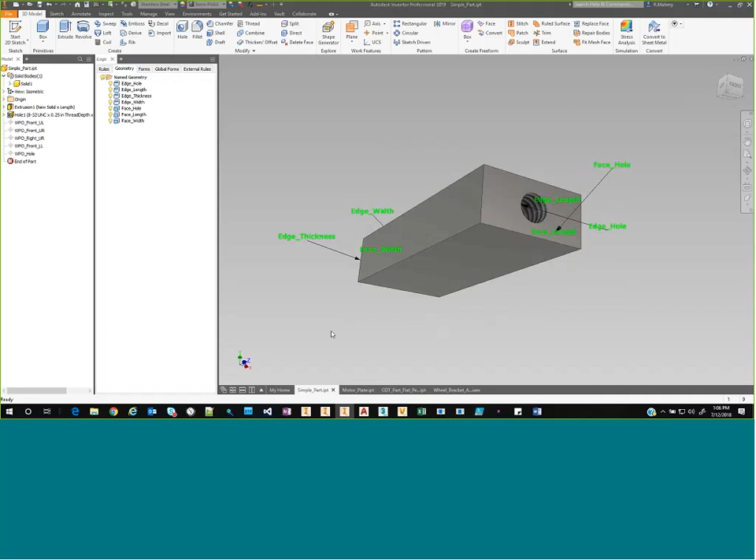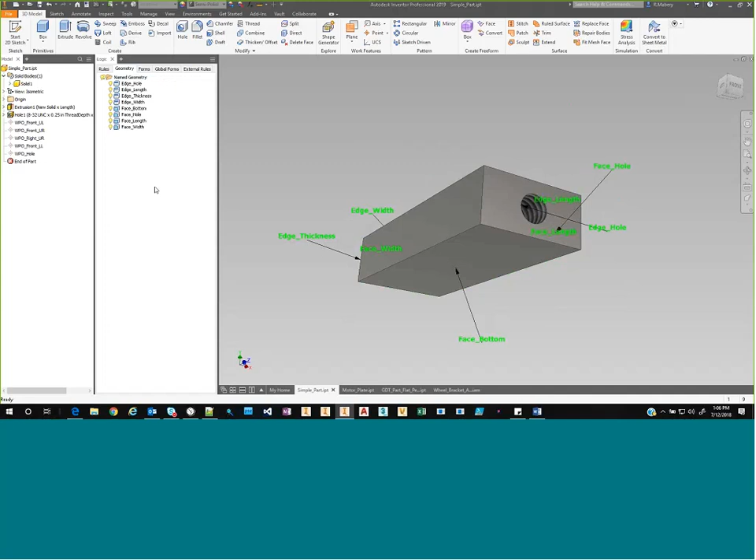If you guys have Inventor 2019, I can select on a face or an edge or whatever entity I want, and then using right-click, go down to the contextual menu to the new command called assign name. What this actually does is create an attribute and assigns that attribute to that entity. In this case, I'm going to call this bottom face 'bottom.' I hit OK, and it'll show up over here in my geometry tab of my iLogic browser.

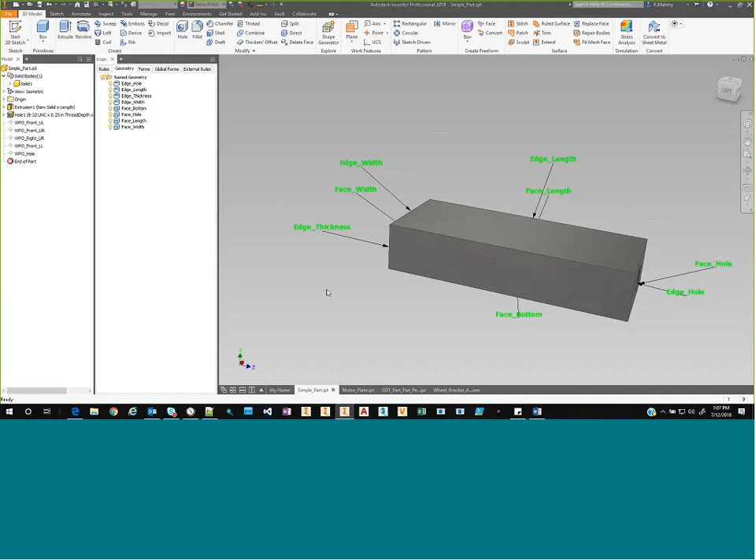So what we use those for is to go back and find geometry that I want to work with later on. In this case, I've got an edge marked here for edge length, edge width marked, and an edge thickness, and that's working directly off of that geometry. So there is an attribute tied to those faces or edges that the iLogic code can go back and find.

You also notice that I have some work points listed out inside of my model browser. We use those as well when we go back and create the 2D drawing. So the first thing I want to do is turn back off this geometry.

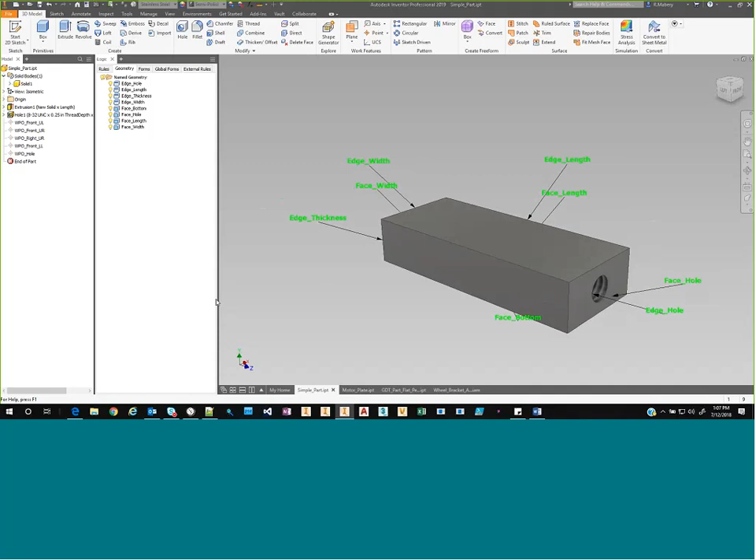Switch back over to my Global Forms tab. I just stuck some of my rules out here on my Global Forms tab just to make it easy for the WebEx here so I can easily create these. So I'm going to go ahead and run my 2D drawing first.

Again, making a traditional 2D technical drawing. I'll give you a quick overview of what's happening: the code goes in and finds a parameter inside of my model. In this case, I'm defining the width parameter as how I want to control the scale of my drawing. So it finds out it's a half inch, it takes that parameter and calculates what scale to place that first view on. I'm going out and grabbing my standard .dwg template.

Again, I'm not opening up an existing drawing, I'm making this straight from scratch. I've predetermined that this is a B sheet, or a B size drawing, based upon what size this part is. That's something I know in the back of my head as I'm doing this code. This is probably always going to be a B size sheet of paper. I'll talk about handling those other cases here in just a minute.

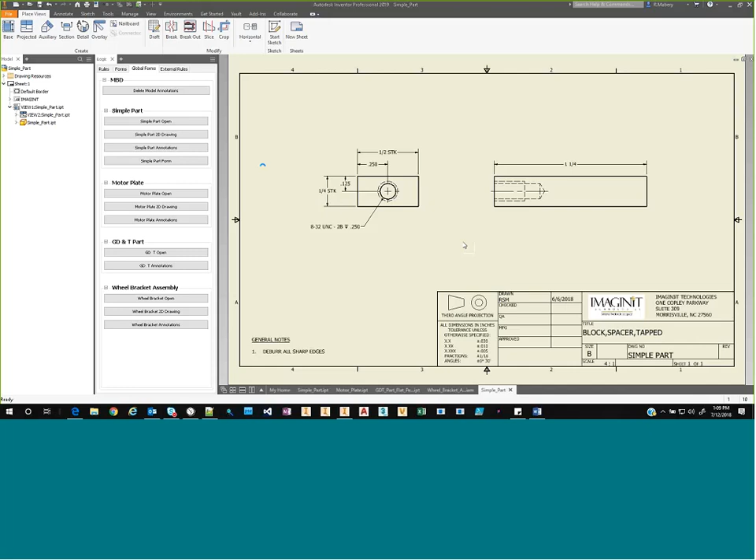So it throws up the base view, creates a projected view, goes through and adds center lines. You notice there's center lines turned on here in both the parallel and normal to view modes. I'm inserting my dimensions. You'll notice here on the front view, I've got some locating dimensions for locating my hole, and then I've also got some stock dimensions.

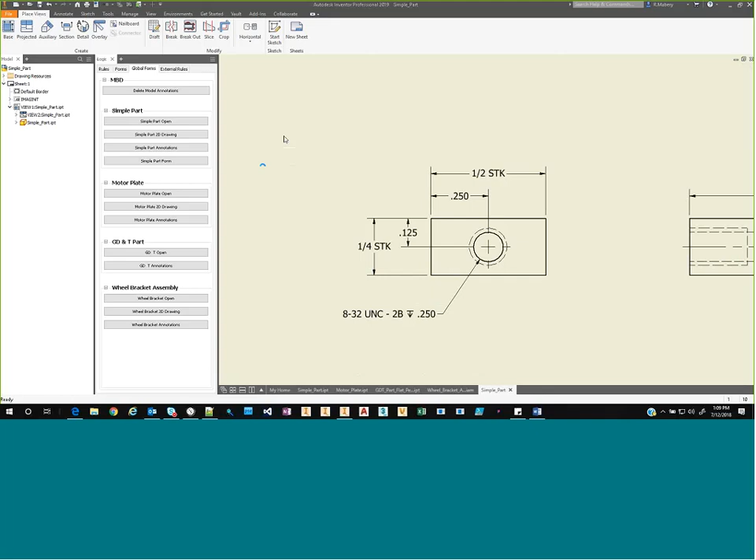Those are using two different types of dim styles. That's something I can control with code. In the hole locating, I'm using 3 place decimals. And then in the rough cut, or the stock dimensions listed there, as well as in the overall length, I'm using a fractional. Those are just different dimension styles that are listed out inside of my Styles and Standards editor in my drawing.

And I'm just calling out whichever tolerance block is required. I'm also inserting the hole note, so this hole note is being inserted, and there's a general note down I'm putting in the bottom left corner.

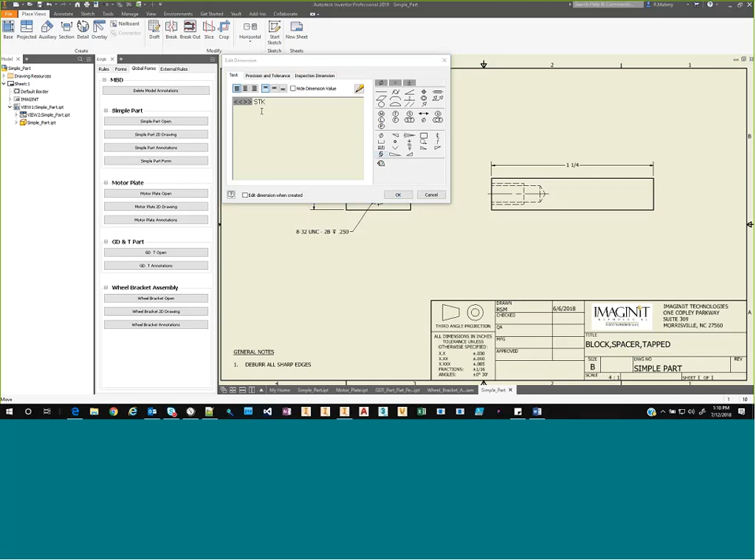These annotations, these dimensions, there's nothing special about them even though I'm creating them with code. If I go inside here and edit this dimension, we get the regular edit dimension dialog box, and we see the STK text I applied to the end of it. That just stands for stock—I'm buying a piece of 1/4 by 1/2 stock, and saw cutting it off to 1 1/4 inches long.

Same thing with the hole note. Nothing special about this hole note, it's a standard hole note. It is tied back to the geometry.

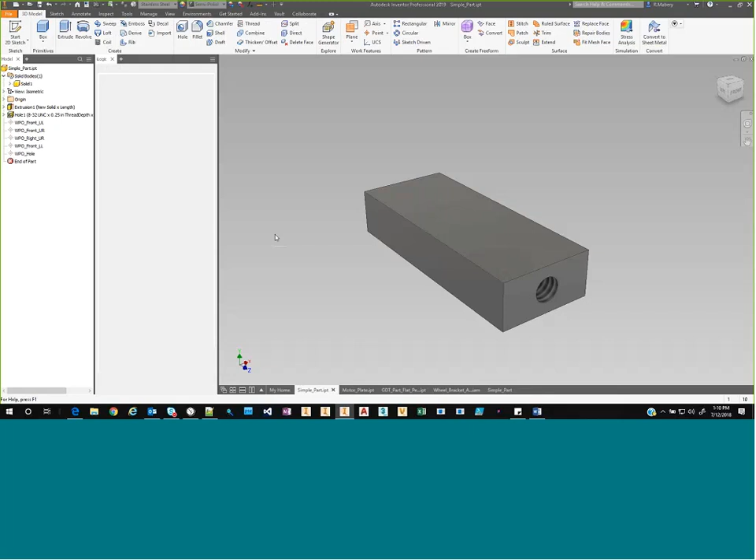So if I go back to my simple part drawing—or I'm sorry, my simple part—I'll open up a quick little form I made, throwing on some dimensions. I can change that length to 1 1/2 inches, and then shift my hole over just a tad, and then go back to my drawing again, and we'll see that it updates. It's all associative, still there.

You'll notice I'm not doing anything in this case about arranging dimensions. That 375 should be shifted over a little bit. This 1.5 inches should be shifted over a little bit. But all that is available through the code.

So the positive side of creating drawings this way—obviously no need to manually create this drawing. This works great for configurators when things are really well known. This is a configurable part; that overall length might change, maybe my hole location might change, so I need a new set of prints every time. So allow the code to go create those for you.

It's still highly recommended that someone puts a pair of eyes on these. You never know what's going to happen. Someone should always be checking every drawing, no matter what, whether it's manually created or created by the code.

Some downsides to creating drawings like this: you have to know everything that's going to be annotated. In this case, this is a very simple block, and if the only variations might be length, width, and thickness—sometimes I might have that tapped hole, sometimes I might not, and the hole size could possibly change.

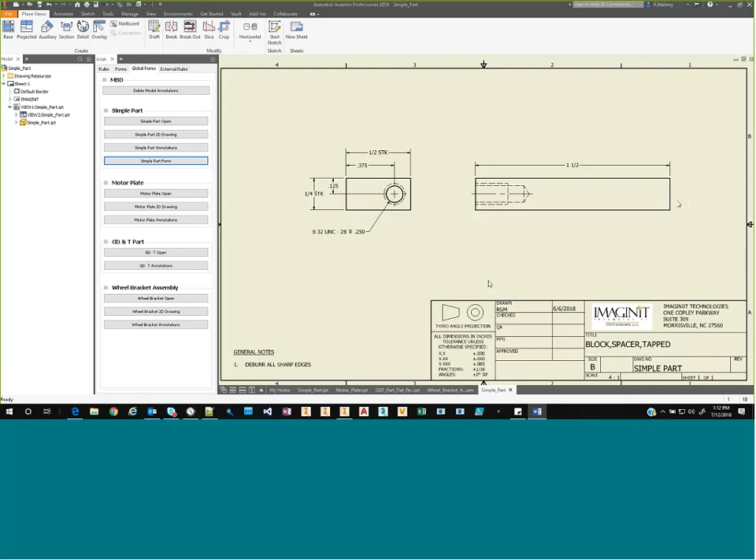I have to make accommodations for all of those instances when writing the code for this drawing. In the case when there isn't a hole, obviously I wouldn't need this 1/8 dimension or this 3/8 dimension up here—those would be gone. So I would space this 1/2 inch dimension off differently, and that 1/4 inch dimension off differently, and obviously I wouldn't have to throw this hole note on as well. I have to understand all the possibilities that might happen and make accommodations for those.

If you think about the general steps you take when placing a dimension—if I'm manually creating these dimensions, I know I'm going to place a 3/8 dimension to locate that hole, and then I know the next one is only going to be the width dimension. So I'm determining the location of this as I'm placing it, and the code is going to have to know all of that as well.

More complex drawings—if you get into assemblies, getting into much more complex parts, moving views—sometimes I might have to have a detail view, sometimes I don't. My section view might have to move around based on what it's trying to describe out of my assembly or part. Throwing on balloons, etc.—all of this has to be really thought out before you start building up your code.

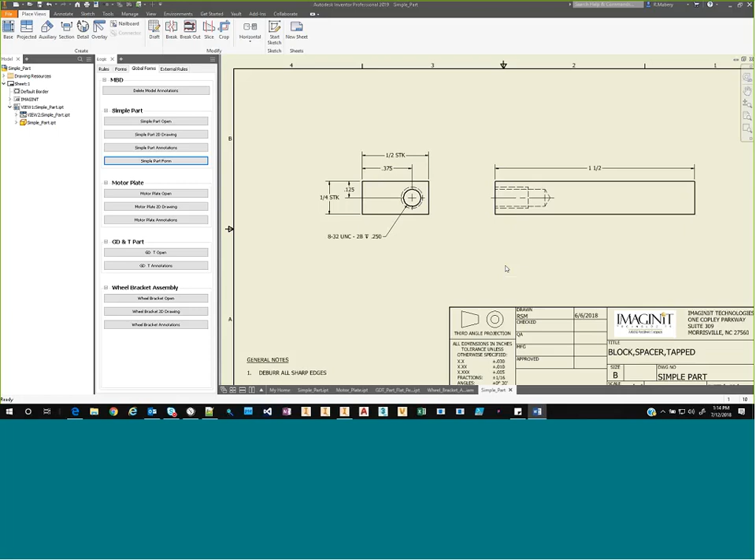So that's the positive and negatives of something like that in a traditional 2D technical drawing. I'm going to switch back over to my simple part here, and let me shift back over my hole just for fun.

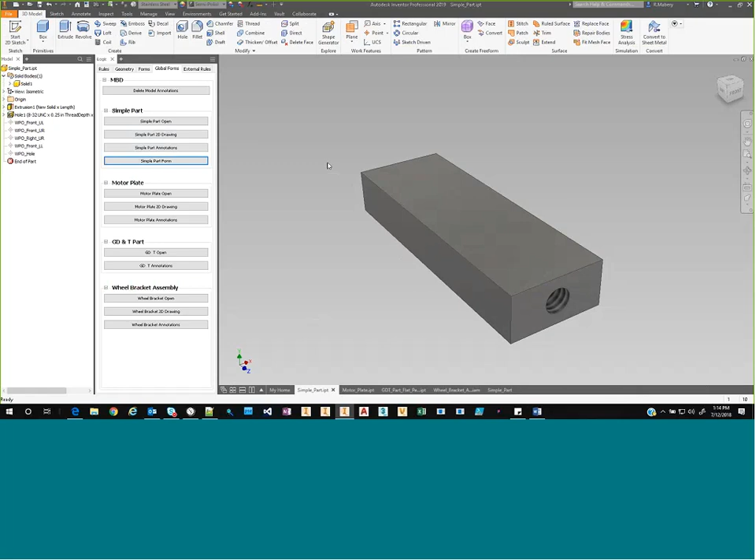Okay, so we can also create what's called model-based definition. It's really been taking off momentum in the last few years. It's a way of describing our model inside the 3D workspace. If you go take a look at your annotate command inside of a part in Inventor, we can see the 3D annotation tools.

My geometric annotation tools, I got some general annotation tools, and then some notes. Model-based definition was first introduced in part mode only in Inventor 2018. And then in the 2018.1 update, they expanded it and gave us some tools inside of the assembly environment.

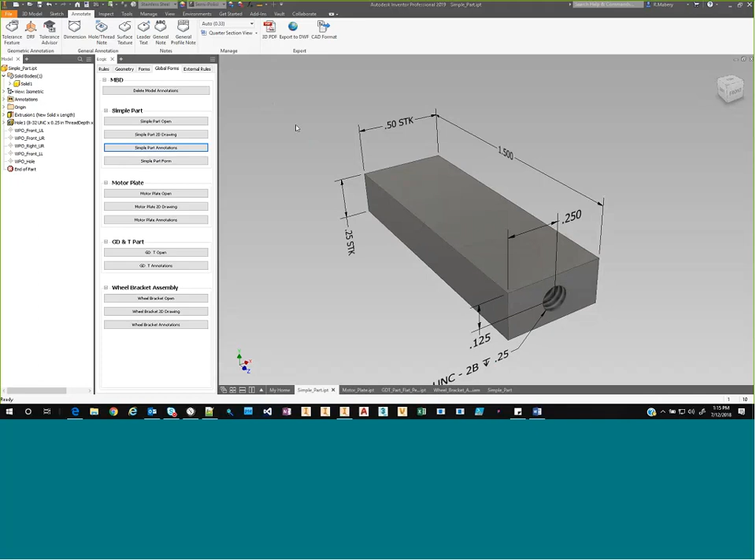So in the same case here, I'm still going to be looking at that named geometry that we saw before. I still want to go back and grab an edge or a face based upon whatever type of annotation I'm trying to put on. If I run my simple part annotation rule here, I'm pretty much creating the same dimensions that I saw in that simple 2D technical drawing. So what I'm doing is going back and finding those named geometries, those attributed geometries, finding an annotation plane to create it upon, and then spacing that dimension away from my part some certain distance. I've got my length and width, thickness, the hole locating dimensions, and a hole note.

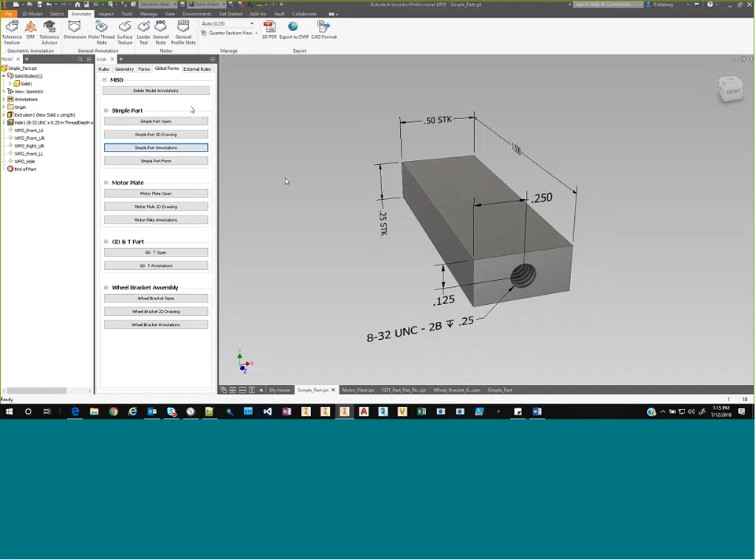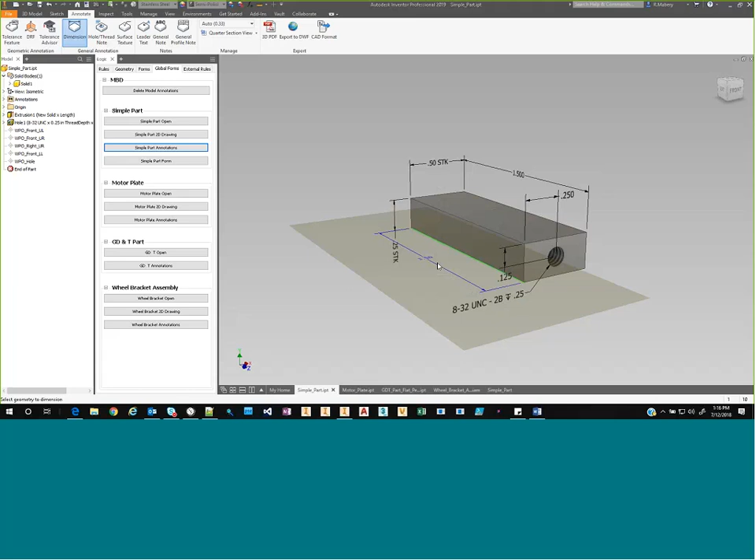Nothing really different about how these are created. If I created a standard general annotation with my dimension tool, I'm going to go click that edge. If you haven't created a 3D annotation in a model, I have an annotation plane that I can assign that to. I'm simply hitting the space bar on my keyboard to flip it back and forth between them. But in essence, it's the same process that I'm doing with the automation tool.

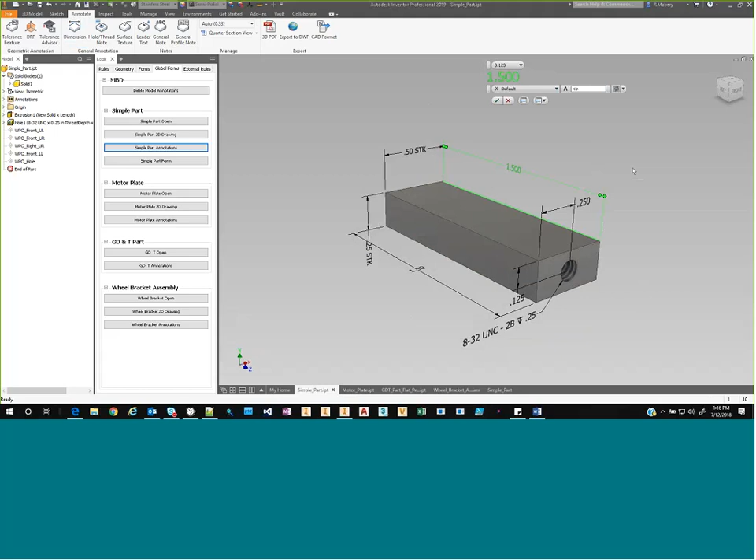Okay, nothing special about these. Let me get rid of this box. There we go. So if I double click and edit that 3D annotation tool, I still have my standard settings. I can change the precision of this, change it from a default to a basic to a reference, etc., changing the tolerancing. One of the drawbacks to creating this with code is I cannot, as of the 2019 version, change the tolerance of this to, say, a basic dimension. That would have to be something I come in manually after creating it and do. But again, you wouldn't be able to tell the difference between what I was creating manually versus what I was creating with code as far as the 3D annotations.

Okay, so some of the things that are supported through iLogic, or more importantly through the Inventor API, are what's in the general annotation panel. So dimensions, hole threads, notes, and surface texture symbols. And then what's in the notes panel: leaders, general notes, and general profiles. What I cannot do at this point is GD&T. I can kind of get around some of that, and I'll show that in a bit. But generally, anything in the geometric annotation, as of the 2019 release of Inventor, which is what I'm running here, is not yet supported through the API.

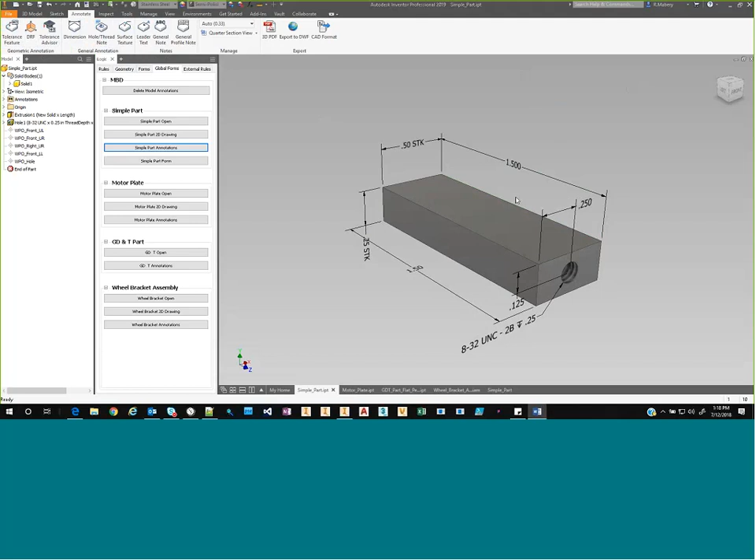Okay, I'm going to go ahead and clean up this model by hitting my delete model annotation rule. I'm going to switch over to another part here, something a little bit more complex. It's simply a motor plate. It's got some tapped holes in it, and I'm machining a channel, a face down on the bottom side. So again, I can create a 2D drawing with this.

Going to see a lot of the same things that we saw in the last example, although in this case I'm throwing in some additional entities. I'm going to throw in some center lines, as well as a surface texture symbol, and then a leader note. So again, I'm creating various dimensions based upon what has to be dimensioned, throwing in a hole note. What we see here in addition are the center lines, that is a pattern down in my parts. Go take a look at the piece part there: there is a rectangular pattern of the holes, and that is showing up as center lines in my 2D drawing.

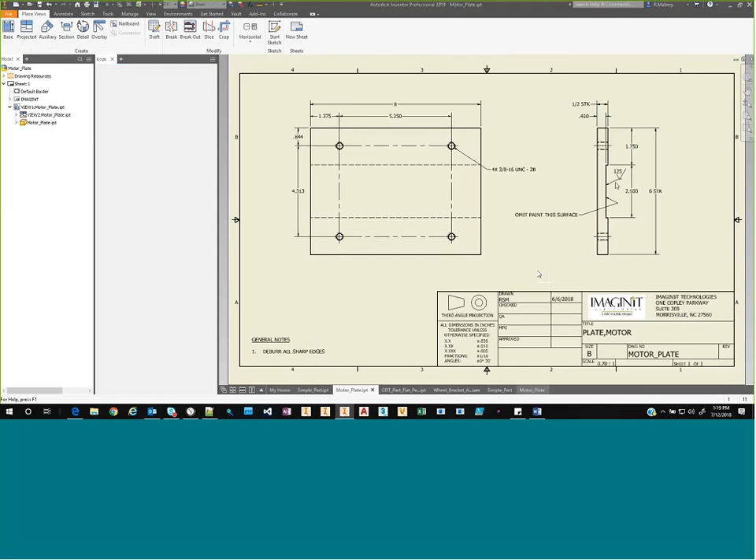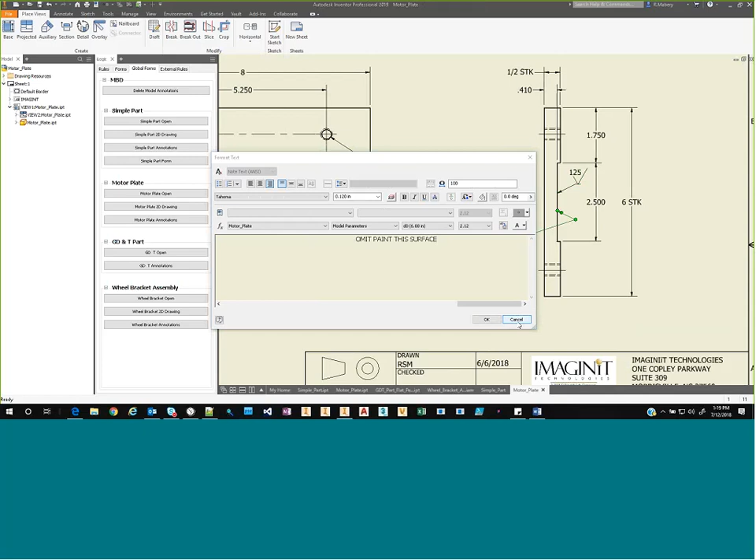And again, what I have here new is a surface texture symbol, and then a leader. Nothing special about this guy. If I go through and edit it, you won't be able to tell a difference between this surface texture symbol or something that I manually created. Same thing with the leader. There's my format text dialog box for that leader. And again, I'm working off of named geometry, whether those geometries are faces or edges.

All right, let me switch back to my motor plate part here, and we'll look at some annotations, some 3D model-based definitions.

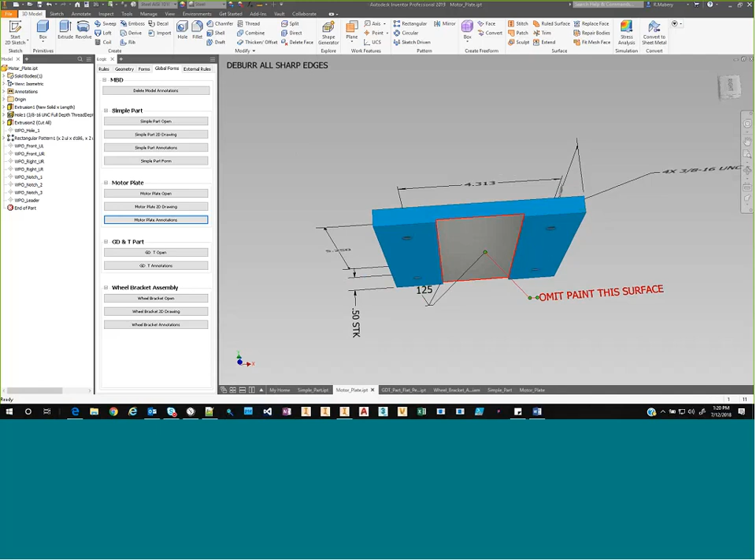So again, I'm creating dimensions, as well as surface texture symbols, and then a general leader. And again, I have the same control here. If I go back and edit the surface texture symbol, I can modify whatever I need to modify about it, and then my general leader note.

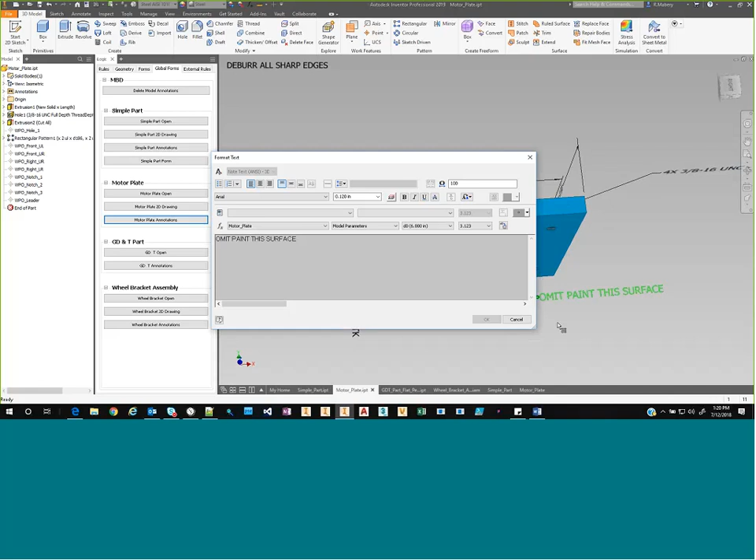One thing I will say about the general leaders, if you create those inside of Inventor with code as a 3D annotation, there is a slight weird thing going on with it. You do have to call out the font specifically. If you do not call out the font, and I go back and try to edit this thing, it gives me a little message that says the expected font of blank isn't available. Everything still works, it's just a weird little bug that's in the system at this point in time.

So again, nothing special about those 3D annotations, whether they be the dimensions, the surface texture symbols, or the leaders.

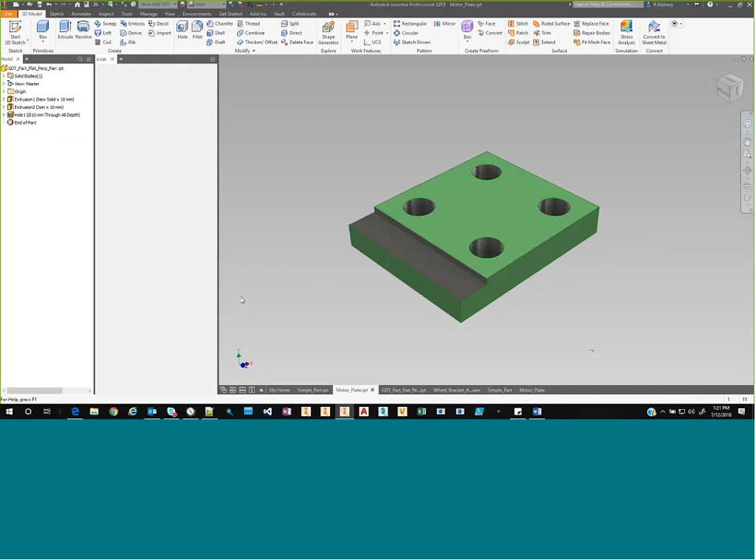I'm going to switch over to a little part here for some GD&T. As I mentioned earlier, I do not have the ability to create tolerance features. I cannot build compound tolerance features. I can't build anything out of this, but I can kind of fake some of it.

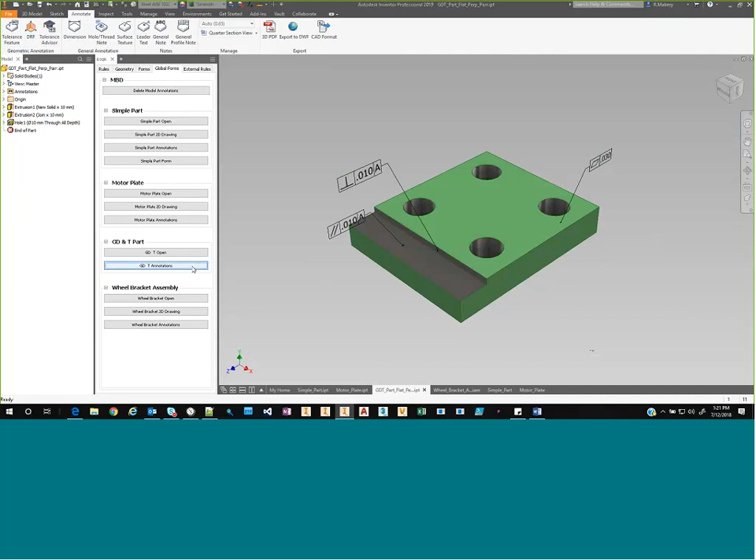So if I run the GD&T annotations rule here, you will notice that I've applied a datum down here to this face. I'm saying this top face is flatness within 30 thousandths. I've got some faces that are parallel and perpendicular to A within 10.

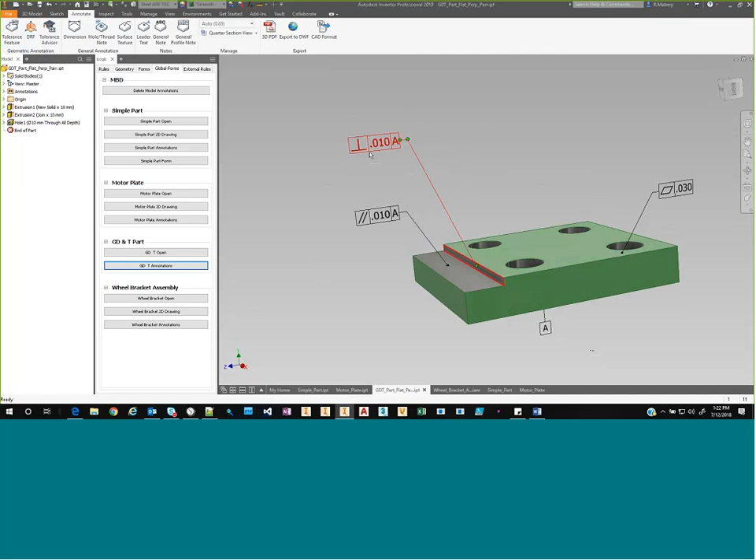The drawback here is that I can't go back and edit these at this point. I can create them with code, I can apply them to a face, I can apply what appears to be a feature control frame. It even shows up over in my annotations, but what I can't do with it at that point is edit it.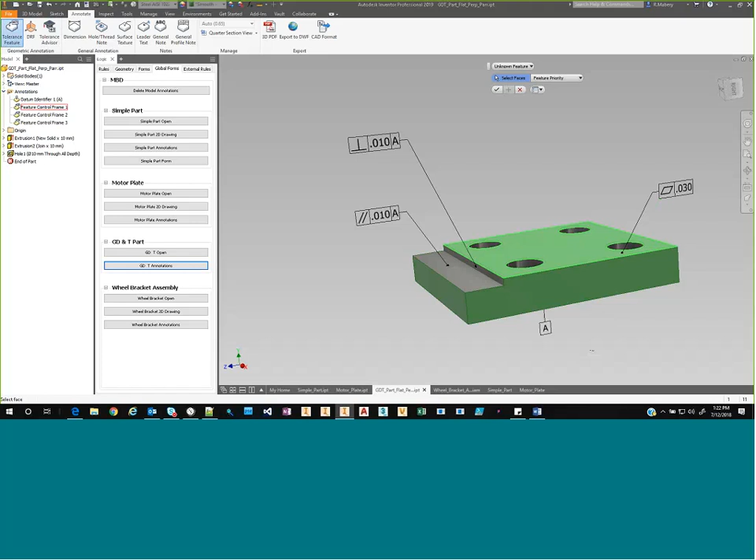I expect at some point here in the next few releases that will be further exposed in the API, as well as if I was trying to create a tolerance feature using the standard tools. Again, this is not something that I can do with the API at this point in time.

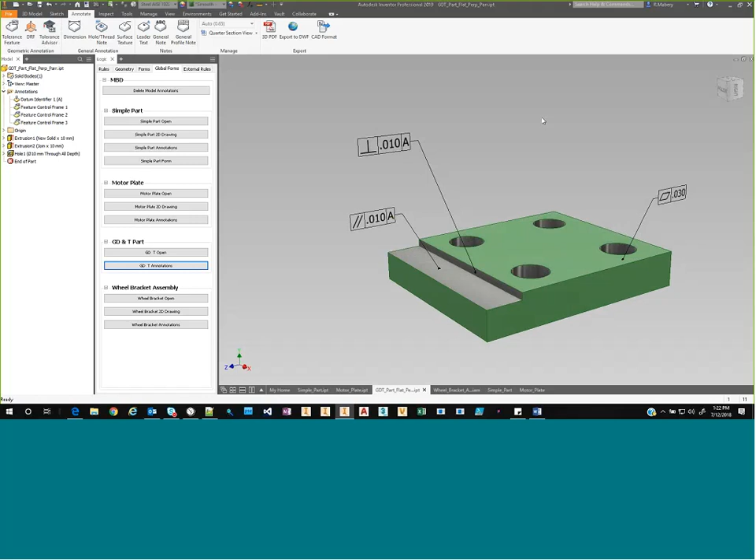Let me go ahead and get rid of that guy, delete that one that I just created, and get rid of the Tolerance Advisor tool. I'll go through and delete those model annotations.

Let me switch over to an assembly mode here. I created a very simple assembly here with some brackets, wheel, some axles, and some socket head cap screws. I'm going to take a look at the 3D annotations here first.

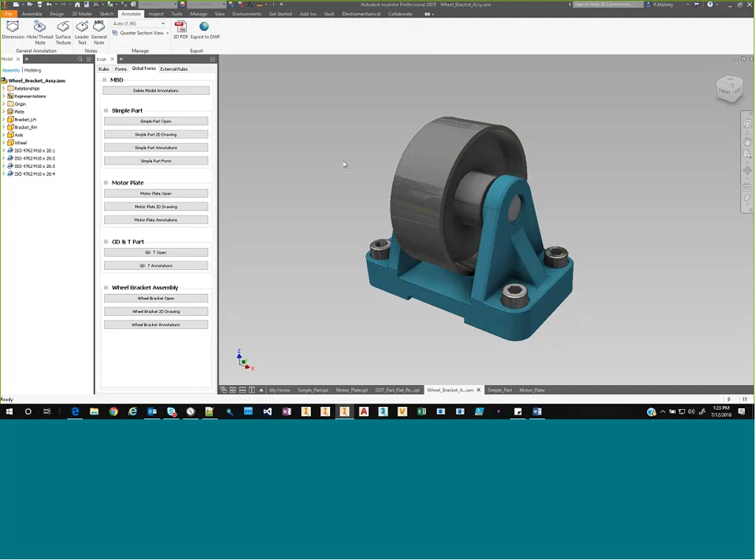So if I go over to my Annotate tab in the assembly environment, assemblies do not have GD&T possibilities. So the only thing I have at this point is general annotation and then notes. So if I run that wheel bracket annotations rule, all I'm simply doing here is I threw some width and length dimensions on here, and then I'm creating some leaders.

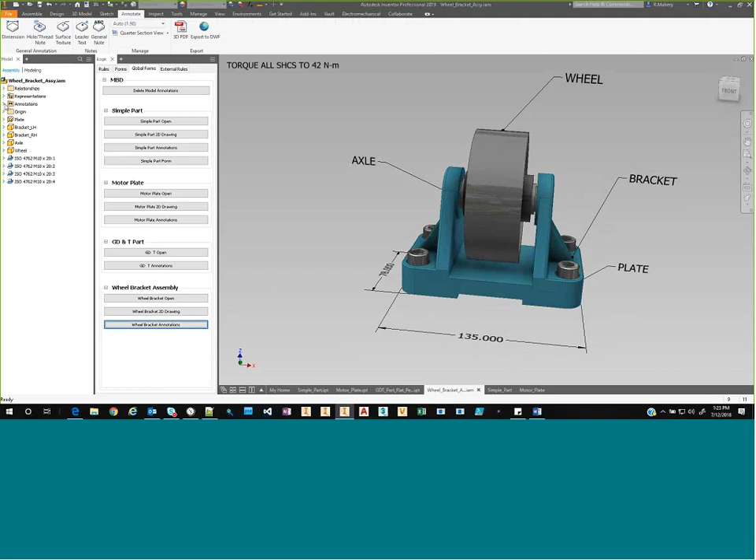I go take a look at my annotation here, some leader text that kind of works as balloons in this assembly mode. Again, nothing special about these. If I go back through and edit them, I'm simply going to open up my text editor so I can modify what that text is. It would be the same as if I dropped a standard leader text.

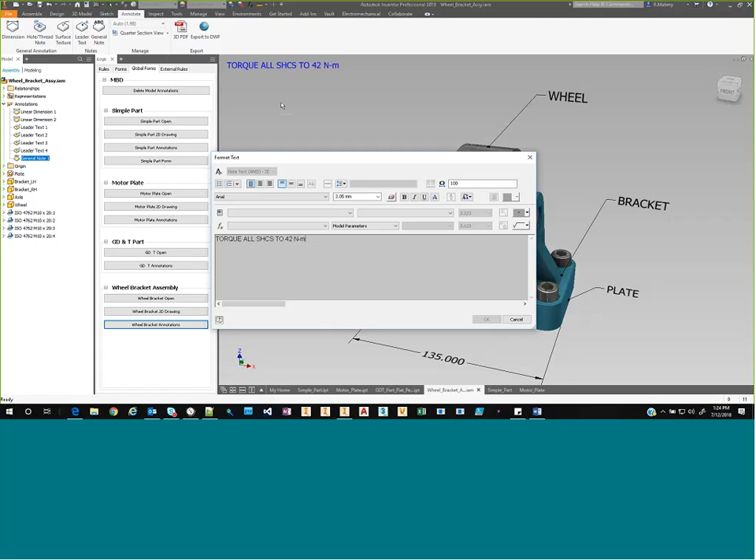Okay, and then I've also got a general note up in the upper left corner. Let me switch my priority here to an annotation priority so I can go back through and edit that guy. Again, I can have the selection or control over what quadrant of my screen that those show up in, and nothing different from those is if I created a general note using this tool and then specifying what quadrant those are supposed to go into.

So again, with model-based definition, my limitations in the assembly are only creating dimensions, hole thread notes, surface texture symbols, leaders, and general notes. Something else that's a little odd that you might beat your head over is I cannot delete these annotation objects in an assembly like I can inside of the part.

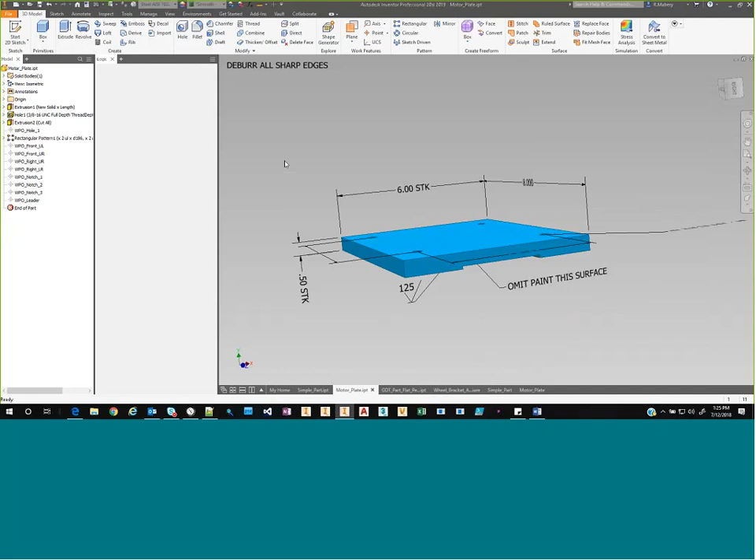Switch back over to my motor plate. I still have these here. I made a simple rule for deleting model annotations, and all it's doing is looping through all of the dimensions, all of the leaders, all of the general notes that I might have on this drawing or on this model, and it simply deletes them.

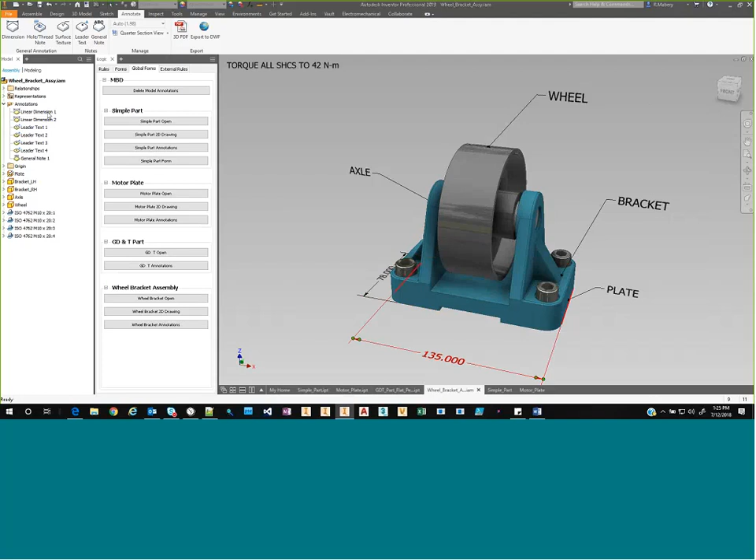Going back to my wheel bracket, excuse me, I still got the annotations there, but I cannot delete them the same way. For some silly reason, that method is not supported on an object inside of an assembly. So if you ever get to that point, at least in the 2019 version, I would have to delete those manually.

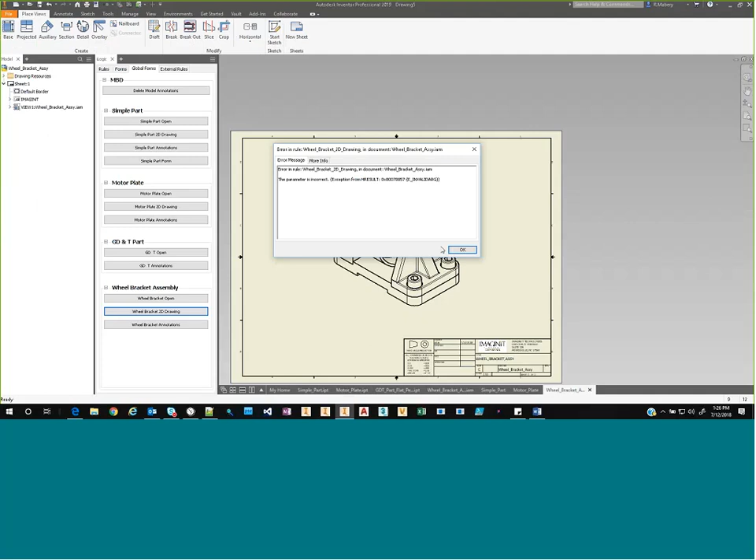Okay, I'm going to try my 2D drawing environment here. I was having something go really wonky right before this, and it still looks like it's wonky. So I can create a 2D drawing, and then we can create balloons and parts lists. And for some reason, I'm not exactly sure what happened between yesterday and today, but that bit that's applying the parts list is wonking out on me at the time being.

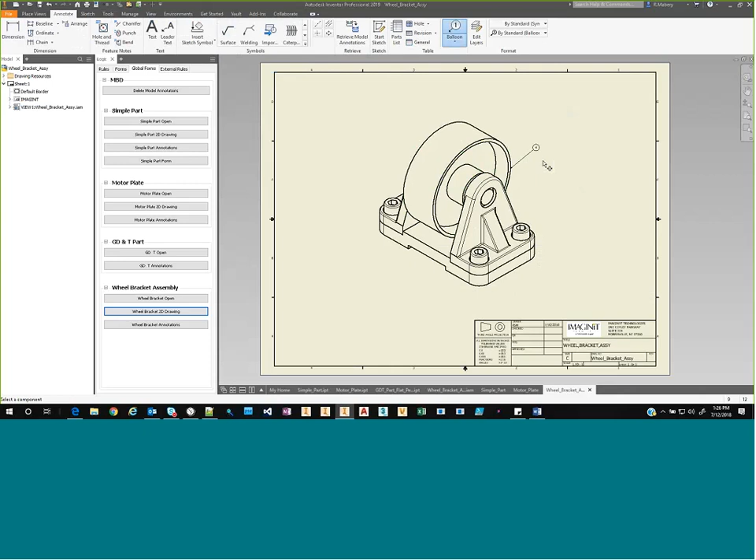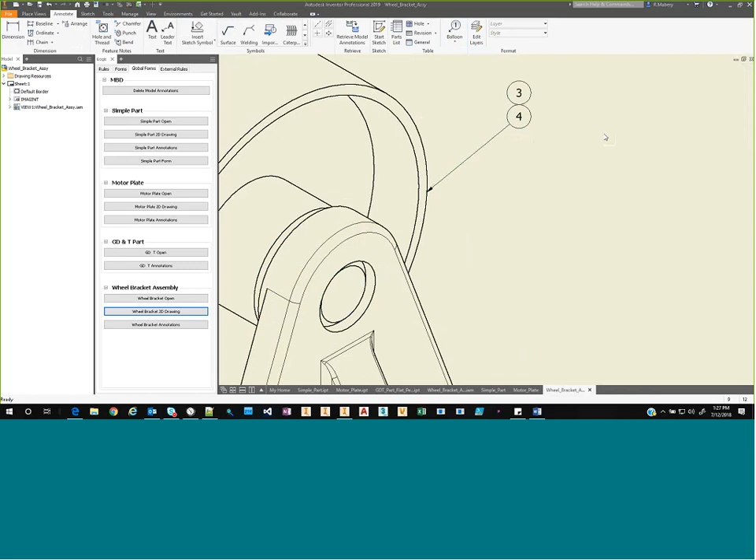So again, some of the limitations with a 2D drawing with code is I cannot collect balloons. If I was going to go back through and annotate that, something you'd do in a more traditional method, if I wanted to throw that axle in here as well, is to attach a balloon for that axle. That's something that still is not exposed in the Inventor API. As of the 2019 version, I'd have to manually create each one of those. Again, you could always come back and attach them, collect them, move them around as you wish afterwards, but it's not something I can do straight off the bat with the code.

Okay, that's it for my show there. All right, very well done. Very well done, Randy.

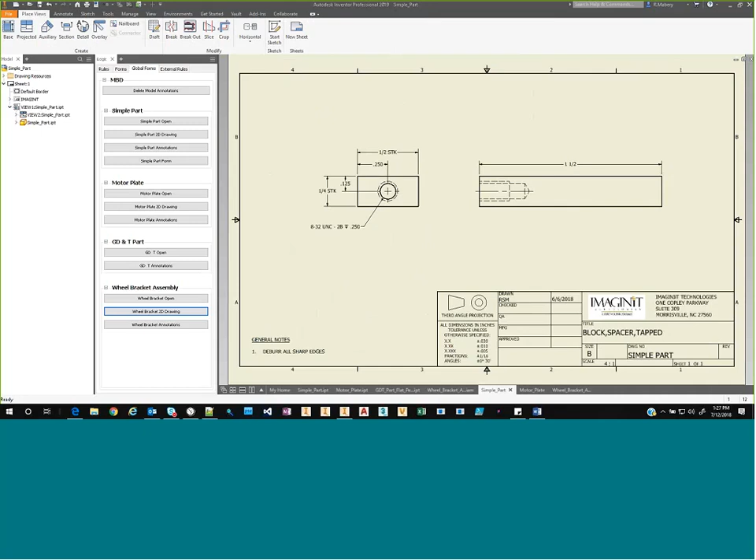While you're putting the presentation mode back over on me, I'll get wrapped up here. I think this is kind of an academic exercise, an academic display on what's possible using automation to describe a model. It doesn't fit for every scenario because a lot of times, you know, a drawing is very unique, and it calls for a specific dimension methodology to make things look like they're supposed to look, all that kind of good stuff.

So it may be better for you guys to think about, well, if we're going to create 2D technical drawings, maybe we just use some common rules that we know are just going to create the views for us. Just slap the views up really quickly, maybe some common dimensions, or maybe even chained dimensions or something like that.

It's always different. Just keep in mind that it's really tricky when we're working with clients describing what looks good. What looks good for one client looks good, doesn't look right for another client. So it gets kind of tricky, and you can get down in the weeds pretty quickly when you're trying to describe 2D technical drawings with dimensions and models and all that kind of stuff.

Yeah Carl, another thing about that spacer block, that very simple spacer block - something like that, if the only thing changing is length and width, then go ahead and make a drawing of that as part of your template. You're going to have to go through and clean up some dimensions, move a dimension from one, shift it over to the left and move it up and down based upon what happened when the part updated.

But if you're not worrying about certain dimensions being there at times and not, views being there at times and not, then sometimes it makes much more sense to have just a simple drawing already made up that I don't have to worry about automating.